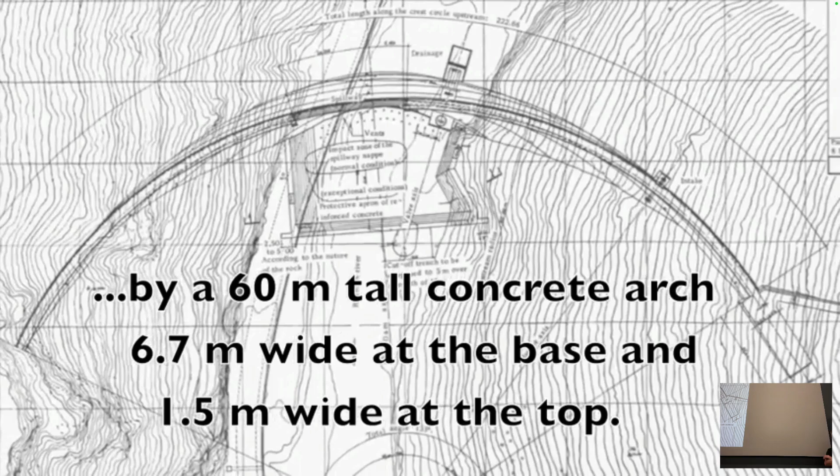And so we'll talk about that starting today. We know how to get a profile of pressures as they change with elevation, and so we need a formal way of being able to evaluate that, and some examples of problems that have developed with that.

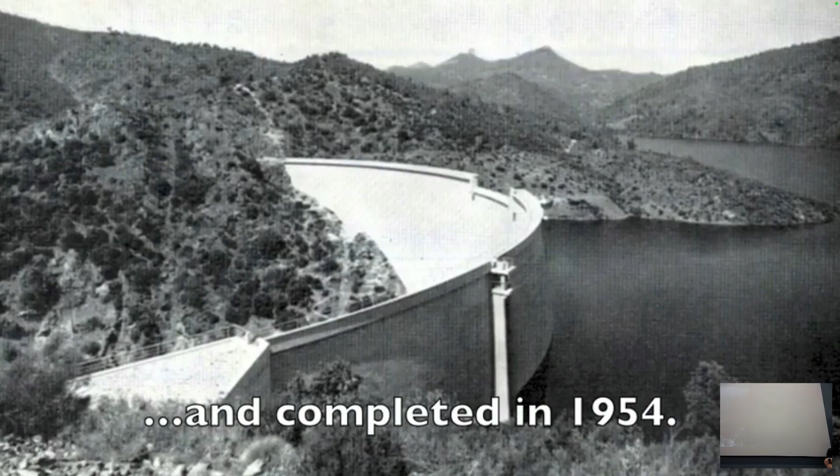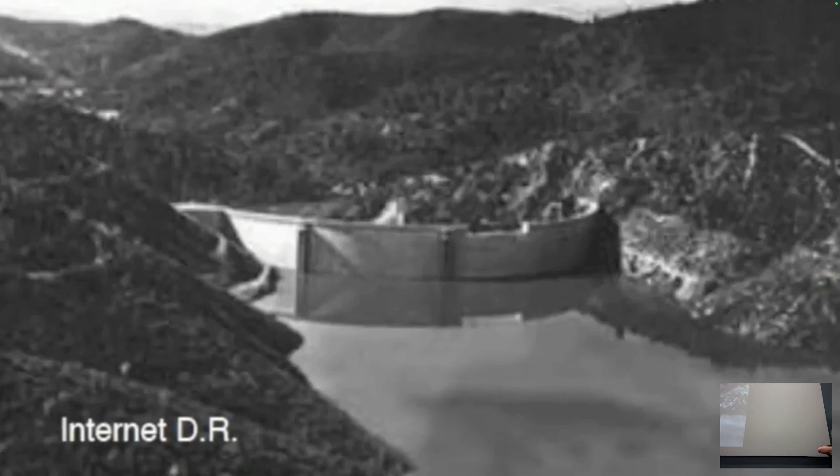One of these is the Malpasset Dam, which is south of France, in Provence, near Nice. It was built in the 1950s, a thin arch dam, so a very thin shell that goes across the valley and is anchored in the walls of a canyon. The water behind it pushes against the back of the dam, and the reaction is from the walls of the canyon.

And of course, in many of the things that you work on, environmental systems engineers, petroleum engineers, mining engineers, you work less with concrete and things that you fabricate, and more with the geological subsurface, things that you don't fabricate but have to characterize and figure out whether they're strong or not.

And so this dam, in heavy rainfall—perhaps it's already broken by the time I've been sitting here chatting—in a heavy rainfall, got loaded up. This would be a spillway, an emergency spillway over the top, so it can discharge when it gets to the height of the dam, because the dam is designed for a certain pressure.

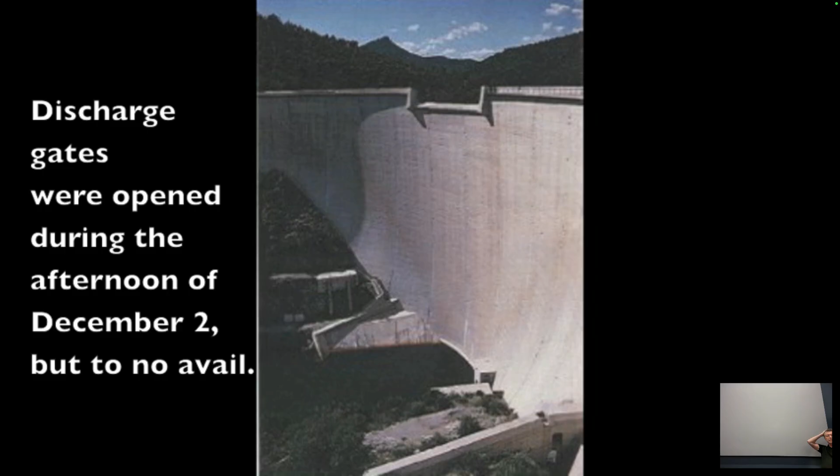And as a result of that, it discharged all the water. Well, I guess it didn't survive, thinking of the Vajont Dam. And so it discharged all the water and it went down the relatively narrow canyon, because typically you build these dams in narrow canyons to reduce the span that you have to complete across the valley.

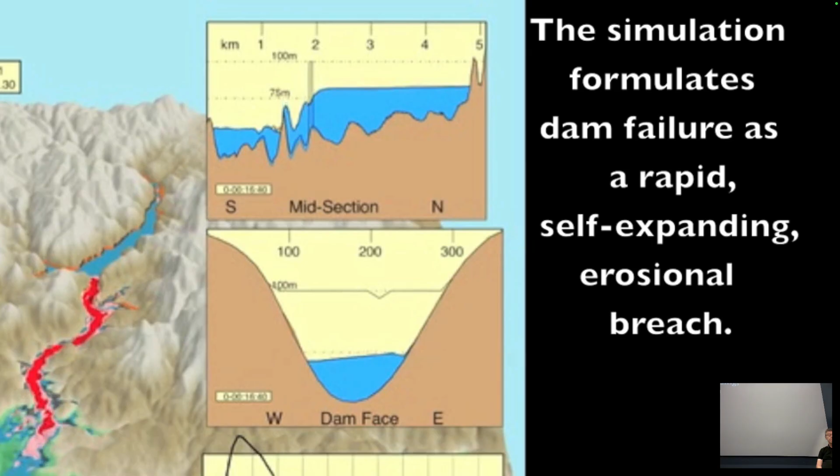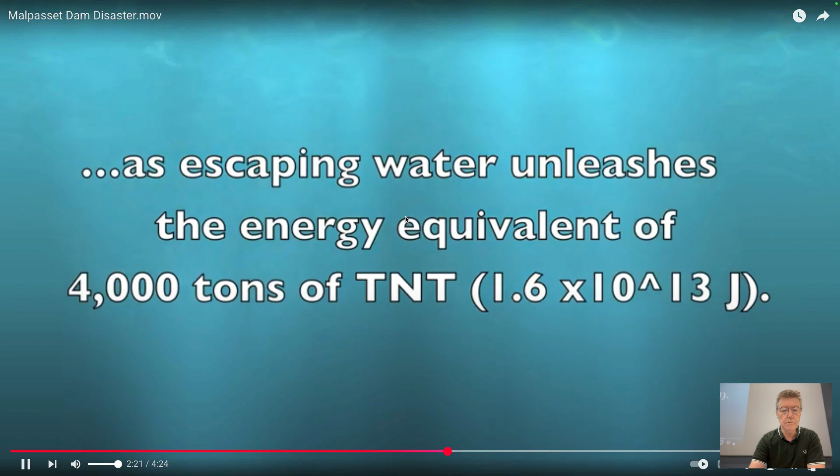And as a result, I think it killed 495 people. And so the question is, how do we calculate exactly the magnitudes of the forces that will be acting on the system to see whether there's enough resistance? Clearly there was enough resistance in the dam, but by the abutment shifting, it fractured, and you saw the resulting gap in it. So that's an interesting statics, fluid mechanics question we have for today.

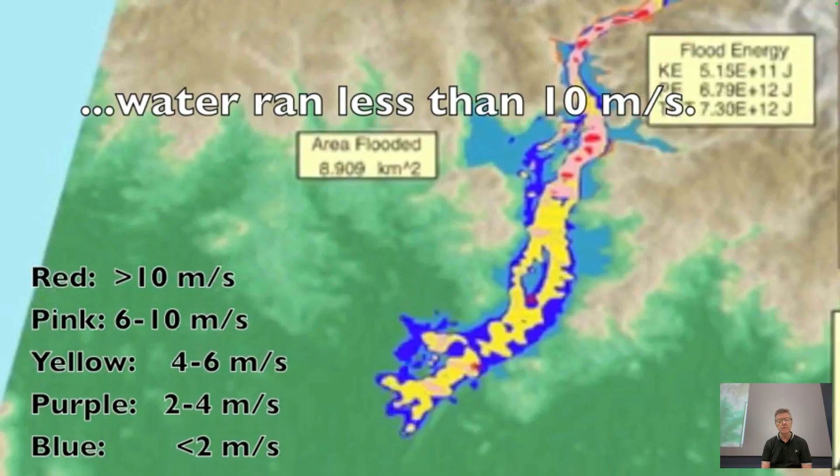The dynamics of it is what happens with the pulse of water that races down the valley that killed the 495 people. And so when we talk about Bernoulli, and we'll talk about conservation of momentum, those are the essence of the mathematics, the physics that goes into the models that allows you to do these calculations—a pretty elementary calculation in this case.

Topography, that you have fluid running across and being able to calculate exactly when it would arrive at some location.

And of course, the most recent example of that would be the Texas tragedy of the kids staying in their camps. Big rainfall—you can calculate exactly what a big rainfall does to the hydrology, surface water hydrology. You get a massive rain landing here, you know the topography, you can do exactly the same kind of calculation as was done for this, and that was done apparently, but apparently wasn't communicated in an appropriate way to them.

Vajont Dam is another dam, another interesting case—not a dam collapse, but a case where the whole side of a mountain above the reservoir dropped into the dam, dropped into the reservoir, and as a result evacuated all the water over the crest of the dam. The dam still stands today. It's got a lot of rock inside the reservoir that was there, but it also killed a couple of thousand people, I think, in the narrow confines.

So we're doing death and destruction, I guess, today.

And I'll go through this quickly as well.

So, yeah, perhaps you don't need this.

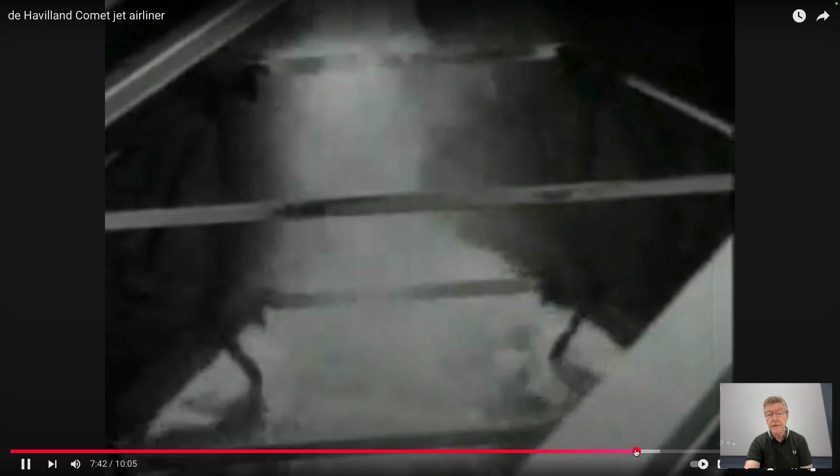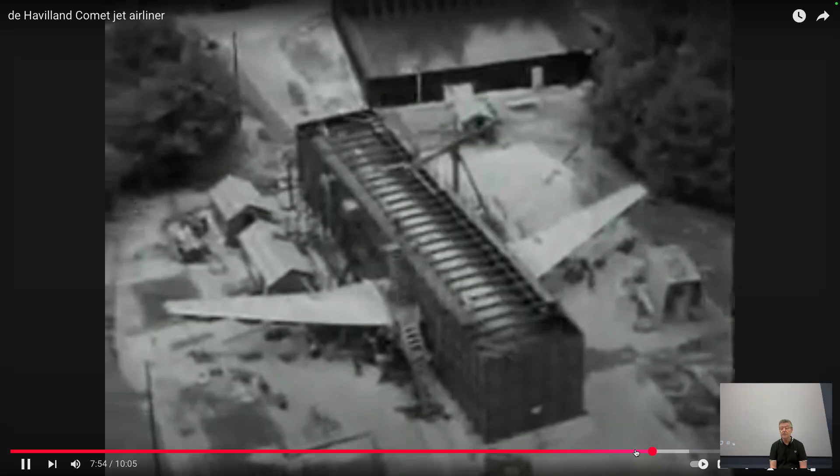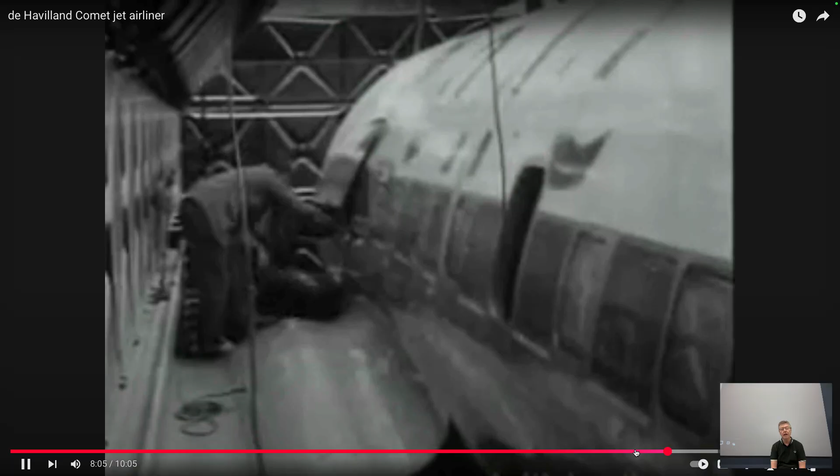But how can you test for that? Well, what you can do is take the plane, put buffers around it in a tank, put water in that tank, and pressurize the inside of the plane to look at the relative difference between the internal and outside pressure as perhaps a mechanism by which it's falling apart. Ultimately, you see again the square windows.

You take it through a bunch of cycles, so it takes off and lands, takes off and lands. If it goes up to 30,000 feet — we saw that at 30,000 feet, Everest, it was something like 20 kPa, surface elevation is 100 kPa — so it goes through that pressure cycle every time you take off and land. As a result, you get fatigue cracking from the number of cycles of pressurization. You could proof test that on an airfield and see when it finally ruptures the skin, applying pressure to the inside of the airplane skin to see exactly why it behaved in this mysterious way you didn't want.

What else have we got? Oh yeah, I think this is an animation as well. Perhaps not in your time — I can't see the. You guys are 20, so that's 2005, I think before your time.

This is Aloha Airlines flying between the Hawaiian Islands. Lots of takeoffs and landings because they have short transit times, so you can squeeze many into a day. Again the problem of fatiguing, and also added with perhaps a salty atmosphere. It ended well, I think, except for one flight attendant who could not be restrained by the people sitting in their seats. Probably not the way you want to travel, landing with such a beautiful view all around you. But it did make it down, and everyone survived.

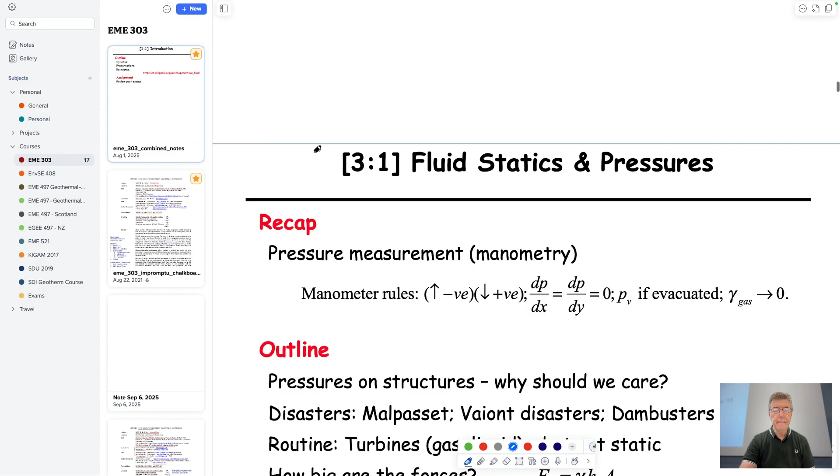So to try and bring the war effort to an end in Europe in 1943, I would imagine that's some of the motivation for the kinds of things we'll talk about today. We'd like to be able to not necessarily destroy things, but work for the public good. So what we'll do is talk about the issue of pressures on structures. We'll spend the next 3 sessions talking about that.

As is our plan, we'll do a very brief review of what's going on so far. We know from pressures at a point, we have a couple of equations of relevance. We know that everywhere, the change in pressure with elevation is equal to negative unit weight. The negative is because the positive values that we have are positive upwards. This is pressure, and this is negative Z, this is positive Z.

And so from this we know for an incompressible fluid, P1 equals P0 plus or minus gamma H. So this would be P0, this would be P1,

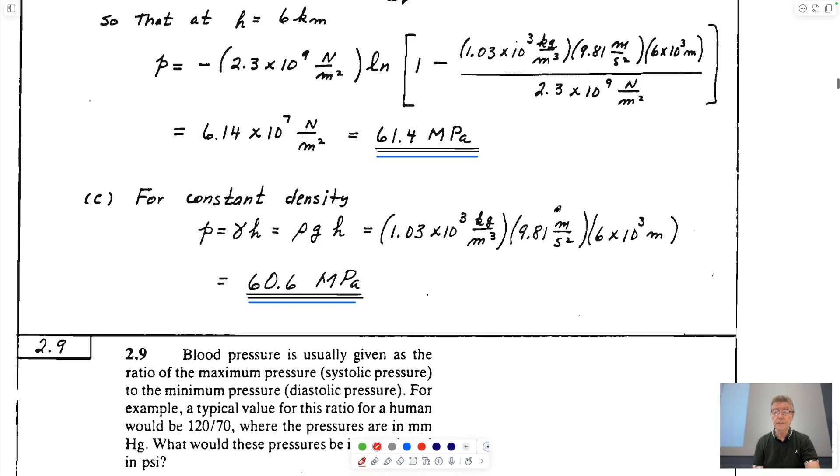And we did some examples with manometers, and we also did some examples talking about pressures on surfaces, if you remember. And if you remember, we talked about this concrete step. The other question we had this morning was about the other way we thought we could solve it, instead of just balancing weights of concrete and pressures acting on the base, we could just do a free body that included just the steps themselves, in which case the pressure acting on this upper step was given by its location relative to the top of the concrete.

This is the free surface of the concrete. The depth would be h down here multiplied by the unit weight of concrete. That pressure would act at a point. And I guess the other thing that we know is that pressures act the same in all directions. So Px equals Py equals Pz.

It was in that manometer equation. And so the maximum pressure acting on this step is going to be the vector which has the maximum component, which will be the one normal to it. So the pressure acting at this point will be in all directions, but we only care about the one which is normal to the surface, because that gives us the force that applies here.

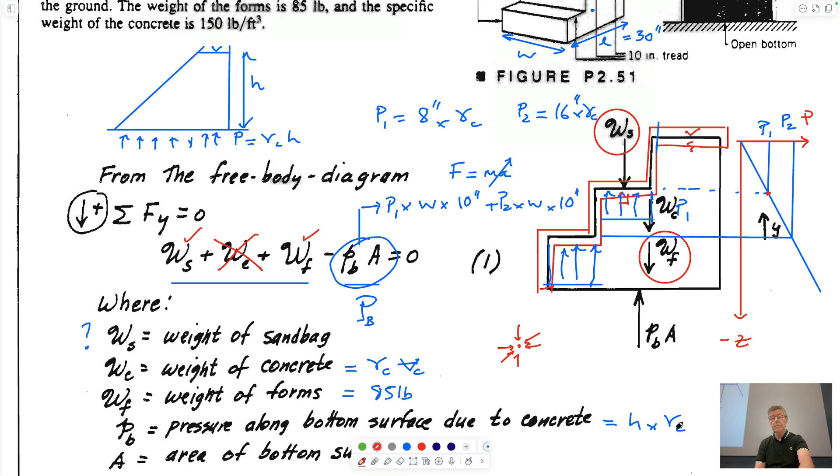You would calculate the forces acting up here inside the bubble, taking the pressure inside the bubble multiplied by an area. The force acting upwards would be equal to pressure times area, that's all we're doing here. This is the pressure acting at this point, which we know how to calculate from last week, but now we'd like to calculate the magnitude of the force that's acting.

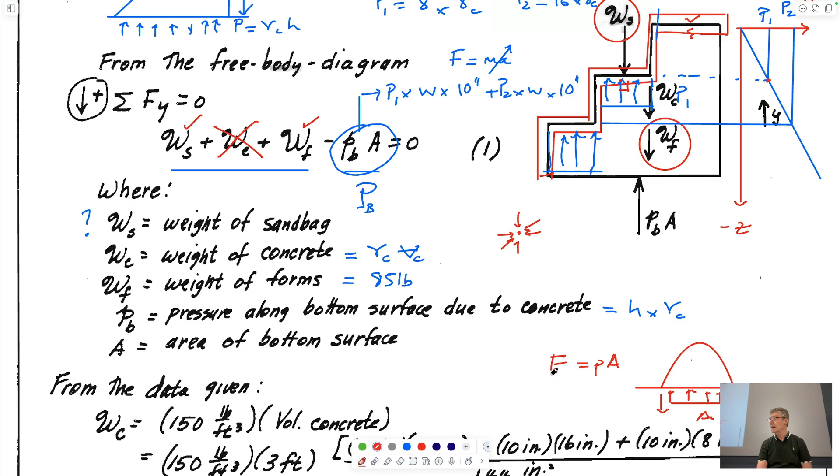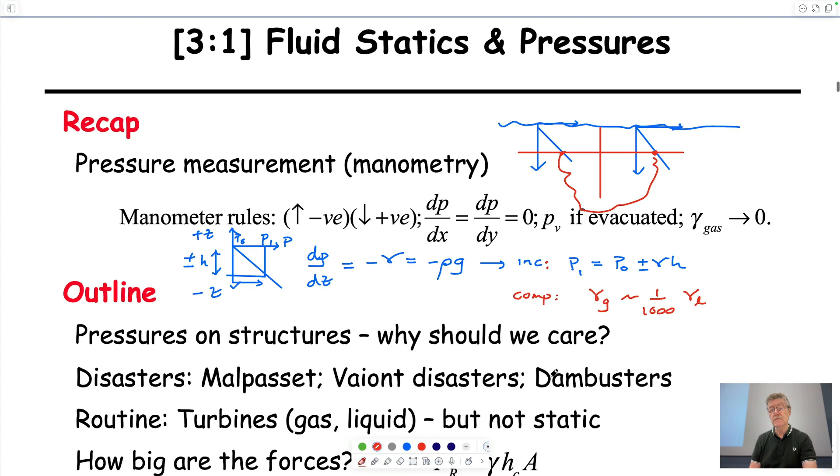So we can calculate the forces acting on the abutment of the Malpasset Dam, or acting on the skin of the Comet airliner, which would act against the tensile strength of the airliner. Or I guess we could also think about a balloon, we talked about balloons as well. That's a much better balloon.

And so we know that if we want a balloon to go up, we haven't done it yet, but we know that the density of fluid in the balloon relative to the density in the atmosphere has to be a certain way, right? It's because of forces inside it. We'll find that out in due course.

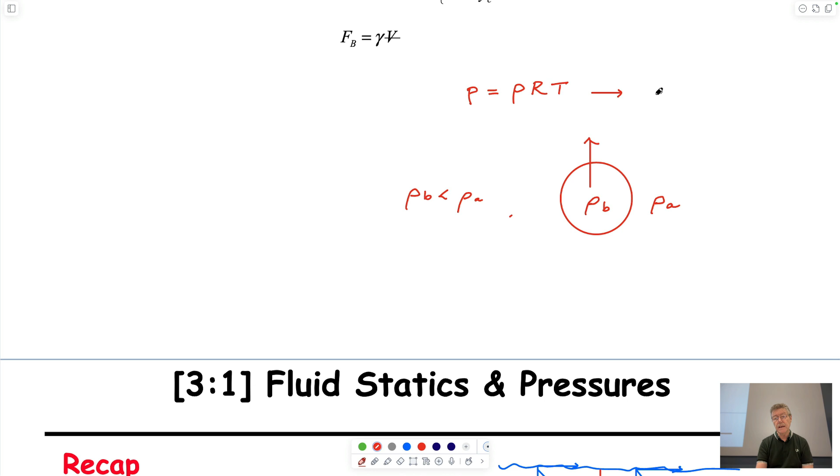And so if we want that to be the case, the conditions for a balloon to rise, you can calculate from the ideal gas law. Absolute pressure is equal to density, gas coefficient, times absolute temperature. If you rearrange that to get the density, you get it as a function of pressure over the ideal gas constant and temperature. So if you want to satisfy this relative to the atmosphere, you can reduce the pressure, increase the temperature, or increase the gas coefficient.

Two of those are tenable, right? Hot air balloon, you increase the temperature. What's the guy's name, Louis de something, the guy who first did it in Paris, in the time of King Louis the something. I guess there are lots of them, up to sixteen.

You can change the gas constant by substituting air for helium, as the Stanford kids did in our view of the Bay Area. P is much more difficult to do. You can't really reduce the pressure because in a collapsible balloon it'll just collapse. If you had a skin that was rigid and you could reduce the pressure, that would be viable, but the problem is a rigid skin is going to be heavy, contributing to the weight acting down in addition to just the gases.

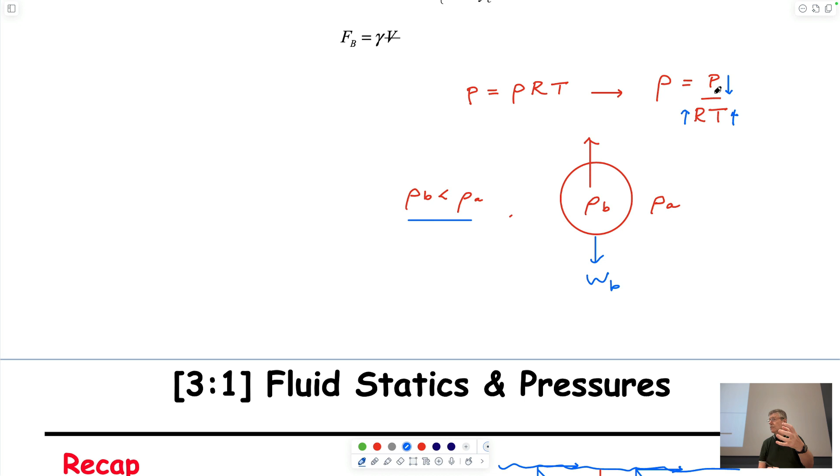So this is the weight of the balloon, if you like. And this isn't very easy to do because it will just fold on you. Things are much less sturdy in compression. If you take a Coke can, empty it, and put a bicycle pump on it to inflate it, you know you can ping it and it will carry pressure. But if you reverse the pump and suck air out of it, it will collapse, it will crimp, because it changes in a different mode. So, neither here nor there for this class, but anyway.

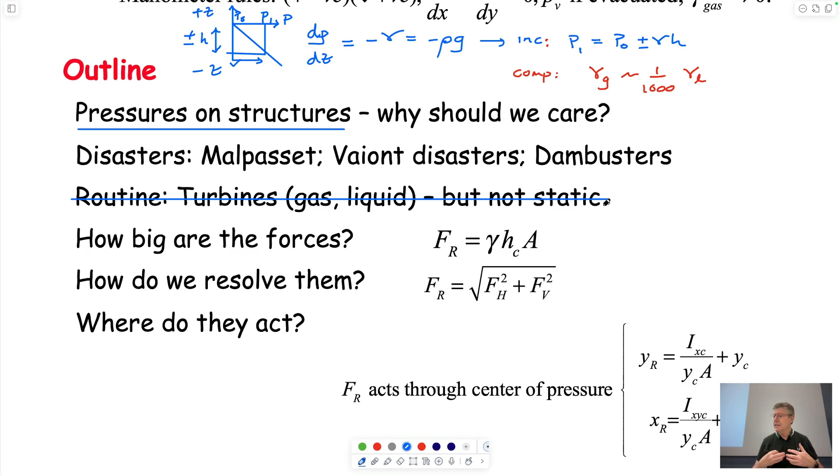So that's where we are with the stuff we've talked about so far. What we're going to do now is talk about pressures on structures. Why do we care? We know. I don't know what this is, so I won't even talk about that. Oh yeah, one of the things was a turbine generating energy from incoming waves, which we didn't go through.

And so there are a couple of things we want to be able to calculate, and we'll use some standard results. Today I want to develop these standard results, but we'll ultimately come back to defining and using them. So if you get bored with the derivations, take solace in the fact that you need the final results, not to be able to derive them, but it's useful to know where they come from. The resultant force acting on a system is equal to the unit weight times the depth of the centroid times A. We'll talk about how we get this.

The resultant we can get because if we were interested - perhaps I'll do them in order, this is an easy one to talk about. What happens if we have a force acting against the dam, which represents - don't do this red one - this represents the pressure that's acting here. Oh yeah, actually let's leave it there, acting here. In addition to the dam, we have...

the weight of the dam acting downwards. And if we know the weight of the dam and the force acting to the side, we should be able to do something to see where the resultant of these two forces lies relative to the toe. If we know where this water pressure acts as an average force, and where the weight of the dam acts as an average force - in other words, the resultant - then what we would find is that we could do something like this.

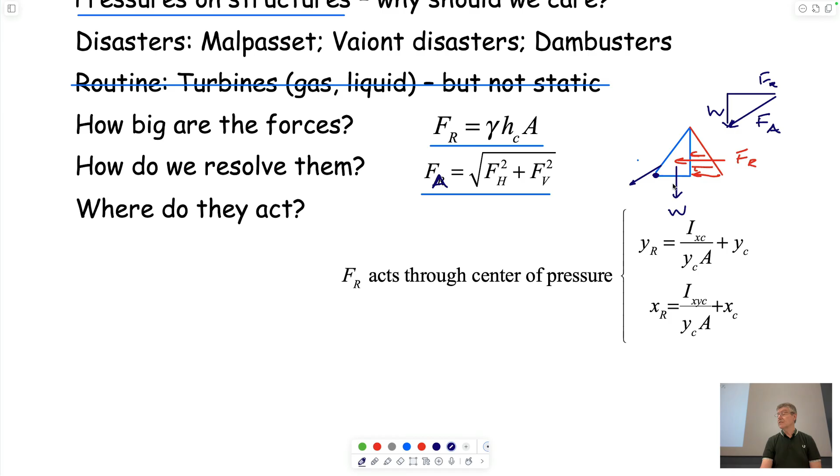The resultant that is acting as a result of these two, in this particular case, is FA. The utility of doing that is that FA, if we know where these act from, and if FA was outside the toe, then it would mean it would fall over like a domino. And we could calculate that. So that's one reason we're interested in that. Let's not worry about that now. We're interested to know what the resultant force is.

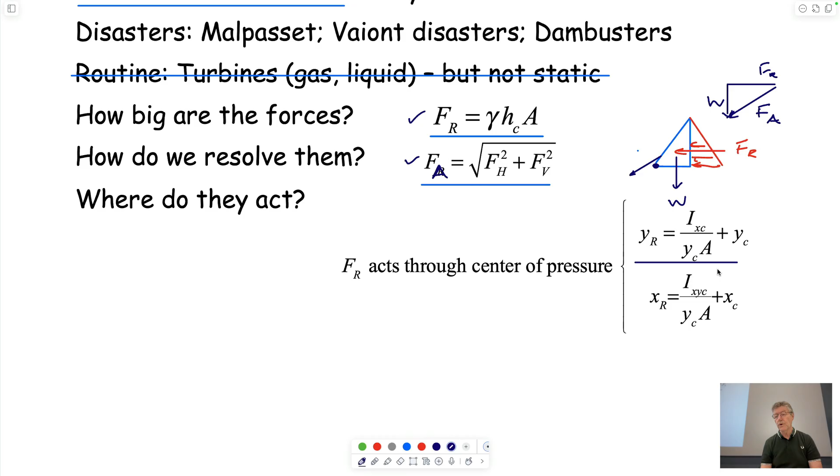We're interested in being able to resolve forces, and we also want to know where it acts. All right, let's do it a little bit differently than I usually do it.

Let's say we fill up a dam to this point here, so the forces are acting on this inclined surface, and we dry out the other side. What we could do is define a horizontal plate. This is the plate of the dam. This is the dam, the vertical dam side. This is the horizontal dam side. We're putting water here, and this plate is where the pressure is acting.

From what I've just said, it acts in all directions on that dam, but we're interested in the one vector that acts normal to it, because that'll give us the maximum force on here.

My attempt to do this is to take this coordinate system. This is going to be X, this is going to be Y. I'm going to draw some parallel lines, and I'm going to do this. Need a wider brush so I don't have to do it so many times. So this is our plate.

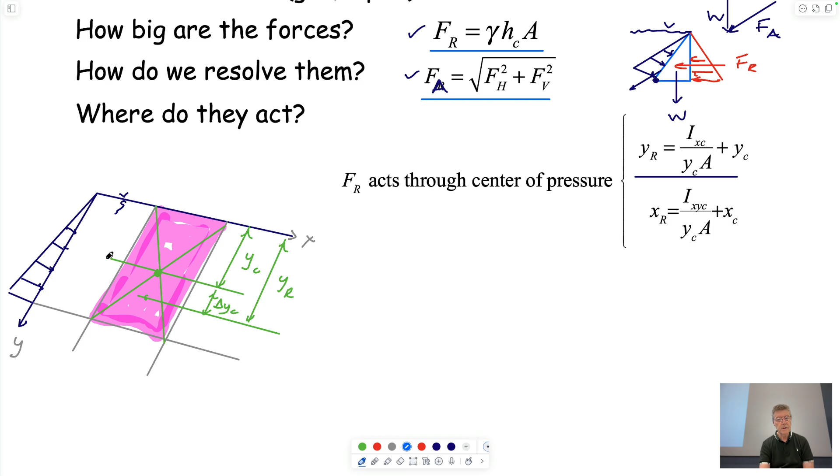In other words, in this geometry, I'm not sure how I can draw it. Perhaps I can draw it here, off to the side. This would be the pressure prism that is acting from the surface, so this is where it intersects the water. I guess the water, if I do it in blue, would be a horizontal line here. Purple is here, water surface is here, and this pressure prism - triangle, I guess, not prism - is coming out here and acting on it.

So there's a lever arm. I don't have a pen. I could write a little dx dy volume here with a lever arm from this point, and if you went all around this thing, they'd all balance at this point. If I had a knife edge for this and put it on that knife edge, it would balance here, it would balance here, and it would balance at every intermediate point that I put it through - the centroid. So you know the centroid from your math.

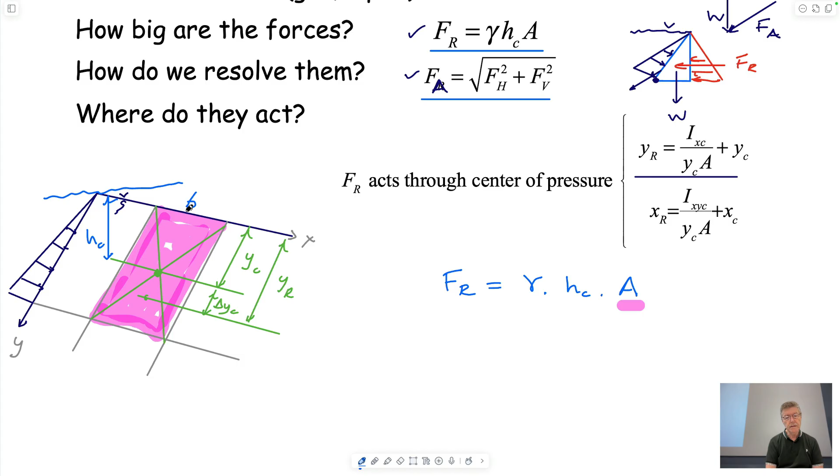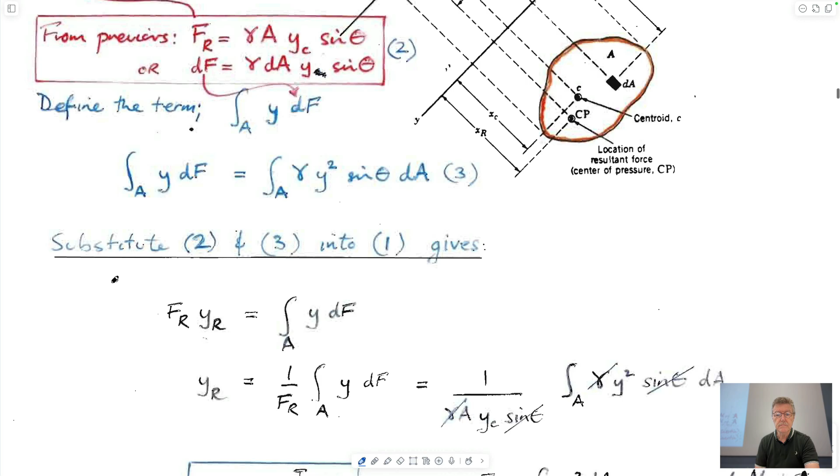Looking for standard results. Too far down. There. Yes.

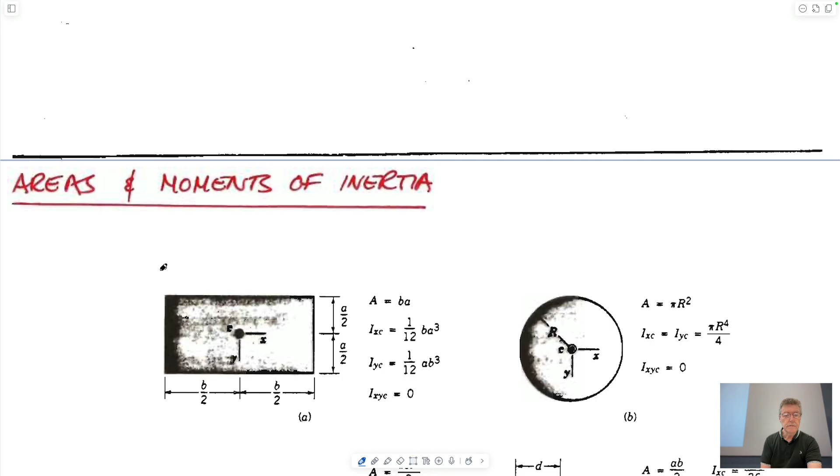B, A. We'll come back to this. I just want to use the same terminology, not technology. Okay?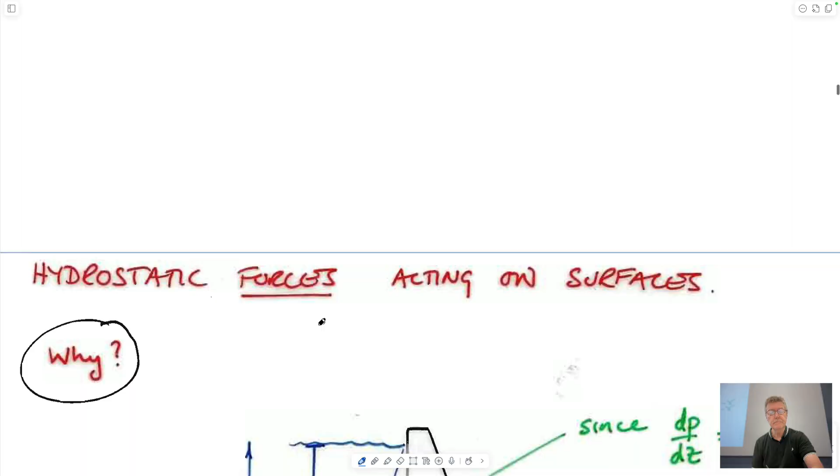So if you know what B and A are, BA, if you know what the depth of the centroid is below the surface, this vertical distance here, and if you know where the centroid is, of course it's the balance point, it's the center of gravity of this, right? This has gravitational attraction for all the weights of the pieces of paper. It could be a piece of plyboard or something, in which case the weight of the board would be more obvious. And it's just the balance point where all the lever arms multiplied by the small weights balance out across it. And you need the unit weight of the fluid.

The reason this works, if you wanted to do it, I don't know whether we want to do the derivations.

If you take a vertical plate and you look at this, so this is this. So this is X, this is Y. What would we do? You want calculus, right? You really want calculus. You're missing out. dy. This is B.

If I just draw what would happen to the pressure prism as you go down, it's like this, right, on the vertical plate. So this is what? P is equal to unit weight of the fluid times depth, y. I'm doing y positively downwards.

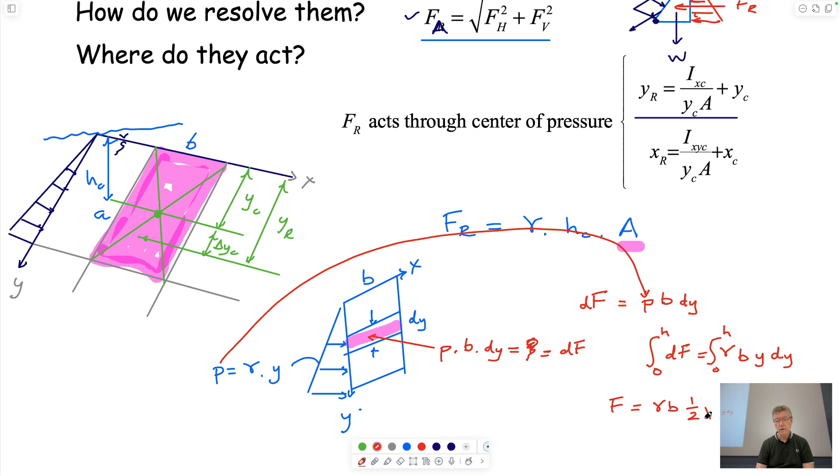And we'd get F is equal to unit weight times B, half y squared. And if we split that up, we'd end up with FR is equal to unit weight times a half. Okay, so I have to substitute limits for this, I guess I forgot.

0 and h. So this will become half y, h squared. So this will become... didn't do that, yeah, h. And get rid of this. So this is equal to unit weight h times b. I think it's right. My math is usually horrible, but I'm pretty sure that's right.

And I'm pretty sure that's right because it echoes exactly what we have here. We have a resultant force. It's equal to the unit weight. It's equal to the height of the centroid, vertical sheet, h, half h, which is this point here, and it's equal to A, which is the height times B. So this is it. So we could have done it by calculus, but this is a standard result.

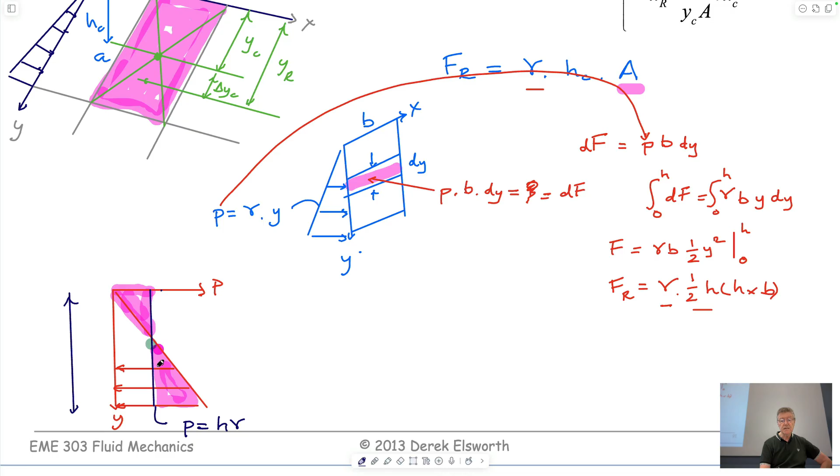Then what we could do is we can take this area here and move it to fill up this gap here. And so, by definition, the pressure that's acting is going to be equal to half the pressure, right? Because we're moving this triangle here to fix for this one. That means that this is just a prismatic distribution. This prismatic distribution is equal to the pressure at a half H, half height.

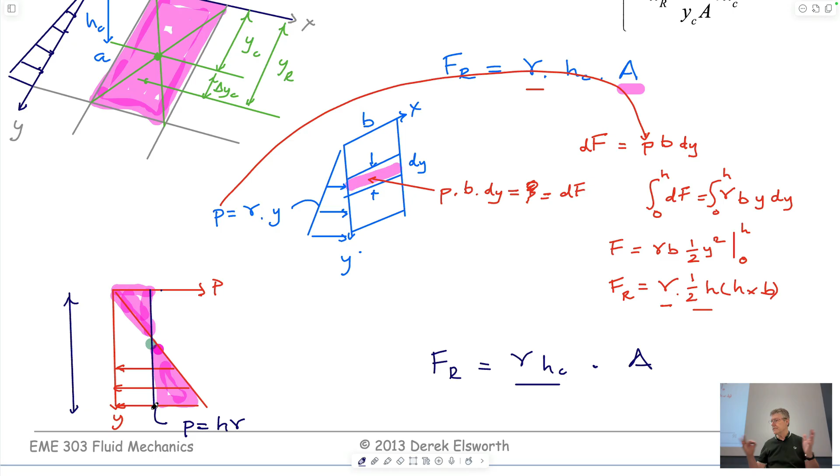So actually the other way to think about this is that if the resultant force is equal to the unit weight times hc times the area, then this is just the average pressure that's acting. The average pressure is acting at the centroid because we can take this little triangle and move it here, by definition, to make this a vertical line. So that's defining it at a whole bunch of different angles. But in the same way that we define that this is always true, absolutely - this is only true if it's an incompressible fluid, but this is always true.

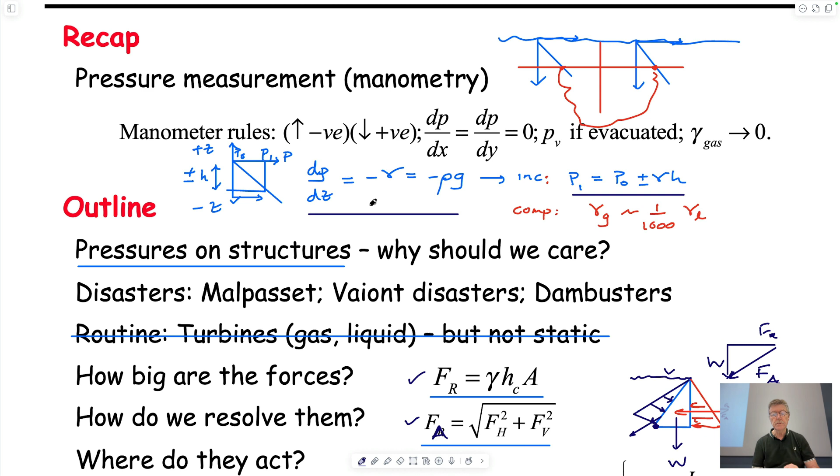This relationship we have, that the resultant force is equal to the unit weight times the depth of the centroid, which is the average pressure acting on the plate, multiplied by the area of the plate. The plate can be a rectangle, a triangle, or a circle. You just have the appropriate location of the centroid.

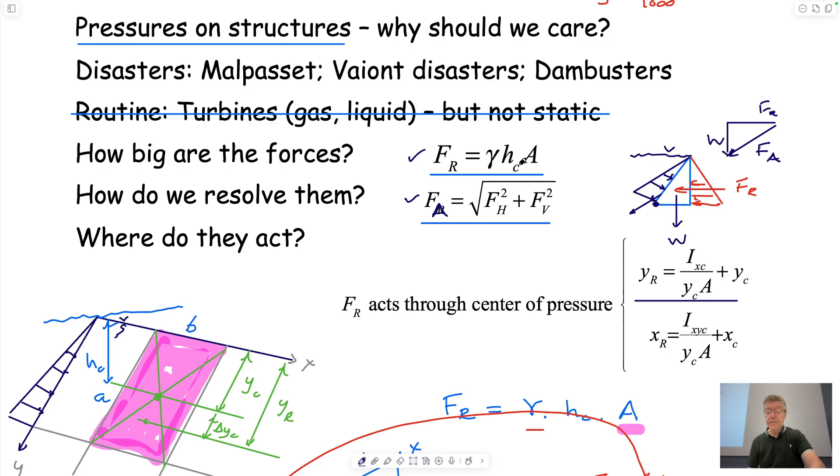The other thing that can happen is that the water level would be, say, this is the surface of the water, and maybe the plate is here, in which case the pressure acting on that plate would look something like this. Again, this is the pressure with depth. I don't know if I did it so it would work out.

I don't want to do that. Maybe imagine if this plate was continued all the way up to the surface. Did I do it right? I might have done it right, actually. It wasn't very cleverly drawn. This obviously has to go to 0 at the surface. It kind of does, but maybe I don't want to complicate it by doing that.

But now, this would be the depth of the centroid, vertical depth of the centroid, h sub c. This magnitude is the average pressure. So this is unit weight times h sub c.

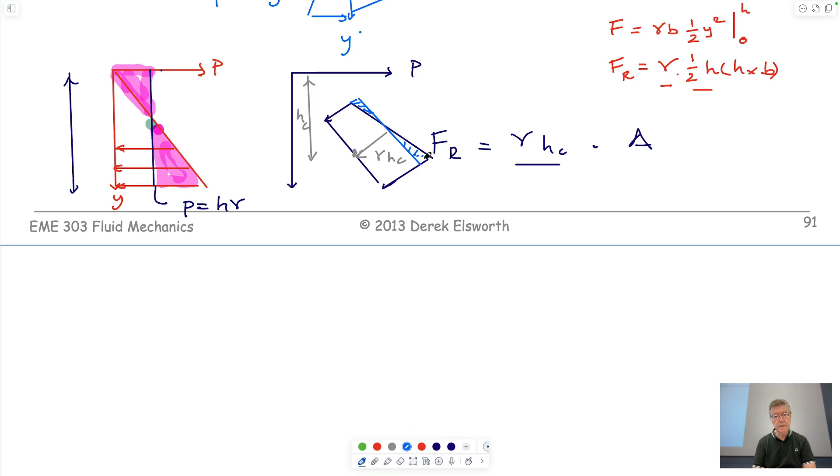And if you draw a line through that like this, then you have adding a bit here, subtracting a bit here, exactly the same as this. So, bottom line, always true. The resultant force that's acting normal to this is going to be Fr.

You'll notice that I didn't draw it through the centroid because it does not act through the centroid. Almost never does. Actually does if it's horizontal, for our stair step, but it will always be below the centroid. And likewise, in this case, FR would be here. Always acts perpendicular to the plate, right?

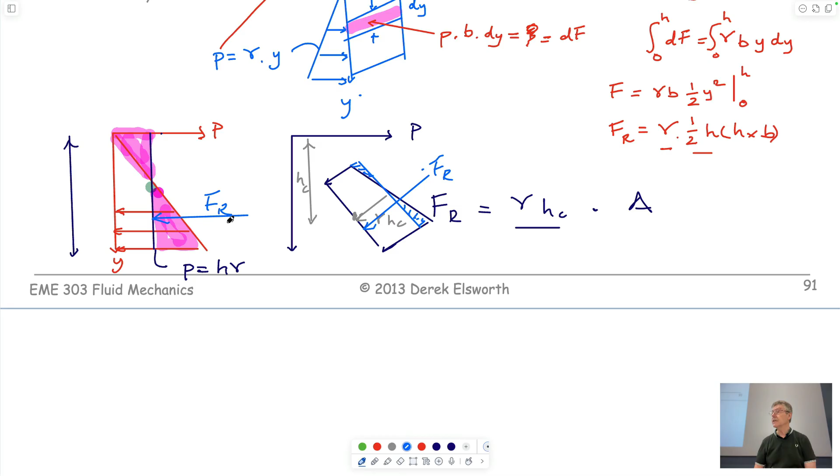So I'm trying to be as plain as I can. The more difficult one, I don't necessarily want to do the derivation. My reason for drawing this figure is that the resultant acts through the center of pressure.

And the center of pressure is given by YR. So when I drew this sloping figure, it doesn't have to intersect the water, but it did in the picture we drew. I specifically drew the depth to the centroid as h sub c, but I specifically drew the lengths in the plane of that flat plate, in the plane of the flat plate, as y sub c. And we call them different things - we call them h versus y. And so the slope distance to the centroid, this is the centroid of this plate, is this.

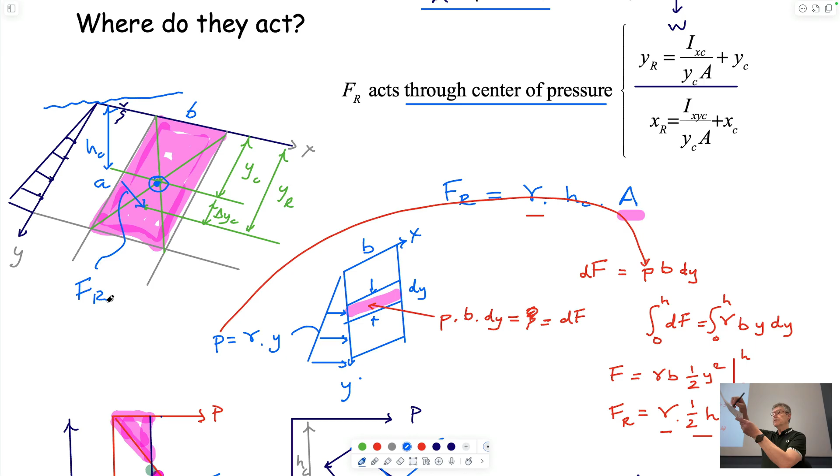But the location where the force would act - I'm not sure if I can do a very good perspective drawing - FR in this particular case would be acting normal to this plate. It would not be acting at the centroid, but would be acting somewhere below it, always below it. Can be equal to it if it's horizontal, otherwise would be below it.

We could derive it. I don't feel like deriving it today. You probably don't feel like a receptor for a derivation today. Do you feel like a derivation today? I'm a funny guy. Come on, cut me a break.

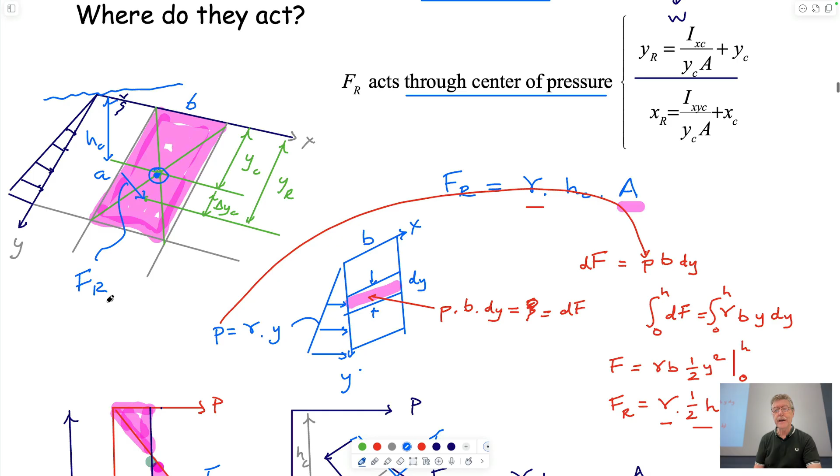Well, we won't do it then, but we will look at how this works. Okay, let's see if I can do that. Let's see how clever I can be. Oh, very clever. I feel clever today. Can I do this?

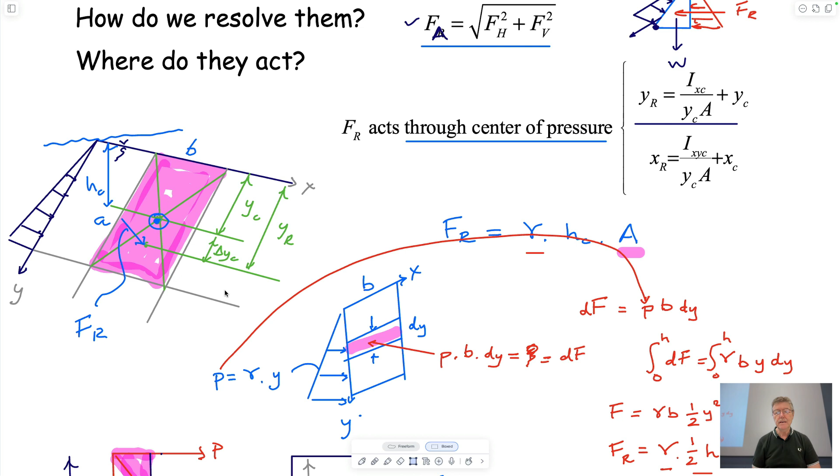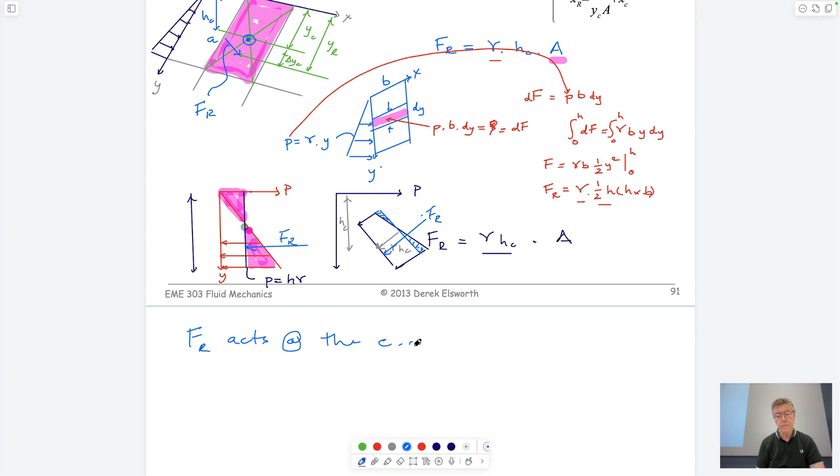FR acts at the center of pressure, the COP. And the location of the center of pressure, YR, is equal to the second moment of inertia about X, about XC - the second moment of inertia of the centroid about X - divided by the in-slope distance to the centroid multiplied by the area of the plate, added to YC. Okay, so these are all the dimensions.

YC is the distance from the surface. Actually, in this case, it's to the plate. But if the top of the plate didn't intersect the surface, it would be the distance to the surface. We'll deal with that in a moment.

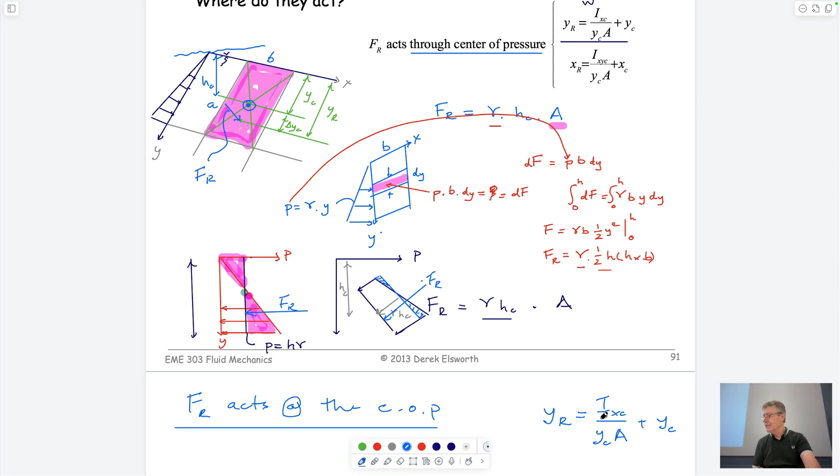And this is the so-called second moment of inertia about the x-axis for the centroid. Sounds complicated, but you've seen it if you've seen structures and beams in statics. It's a standard result for a plate that looks like this.

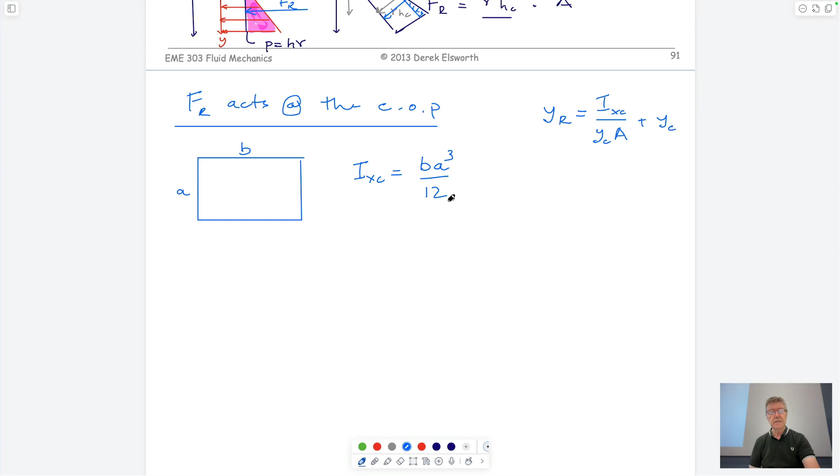That we've dealt with. This along the top is B, this is A. IXC is equal to B times A cubed over 12. I think - I'm going to check in a second, just to make sure. It's the stuff we looked at before. This is all in Munson, if you have Munson.

This is B A cubed over 12. This is the centroid of the plate. So this would be YC, essentially. And this would be width B, depth - which could be vertical depth or it could be angled depth - A, side of the plate.

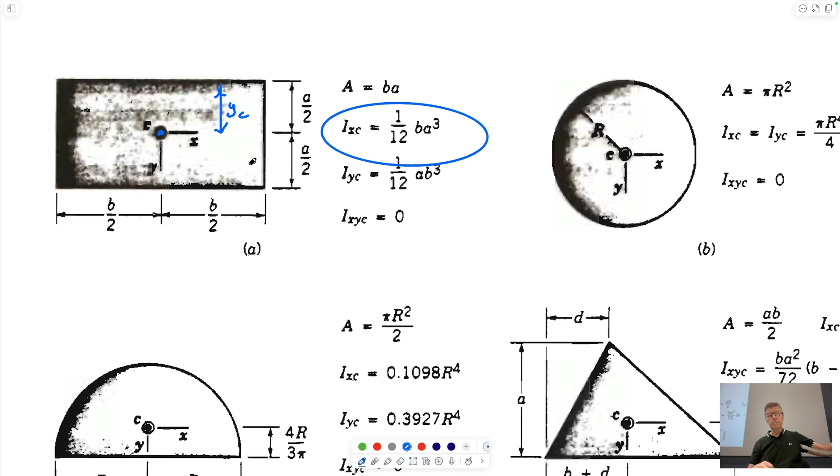So on our plate that we use, this would be B, and this would be - well, we unfortunately called it H, right, because we're looking at a vertical plate, but that's kind of ambiguous. So if we do that, I didn't mean to do that.

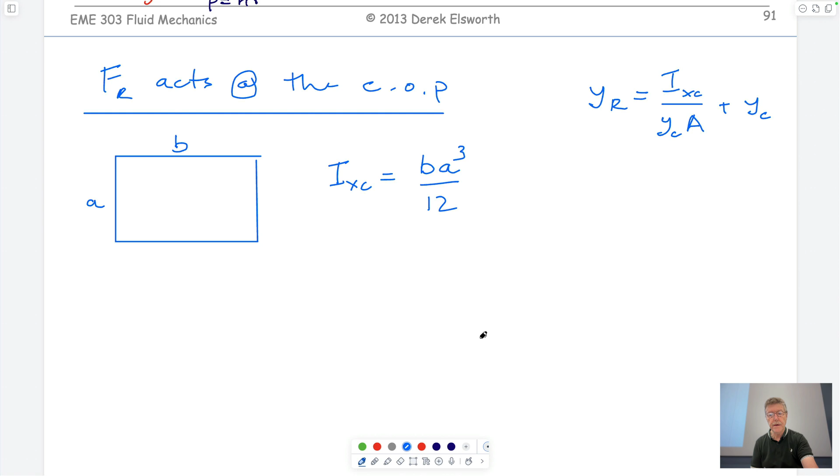Sorry about all the scrolling. So if we wanted to calculate the depth at which it works, we could do this.

YR equals IXC. So it's going to be BA cubed over 12. It's going to be YC, which in our particular case was equal to...

It's okay, so I'm going to do it for the case that we've already looked at. So this is the top of the water level here. This is what we've also called H. So this would be HC. This would also be equal to YC.

So this is a vertical plate. And YC would be equal to A over 2. Okay, so write it as A over 2 here. Area would be equal to A times B. And this would be equal to A over 2.

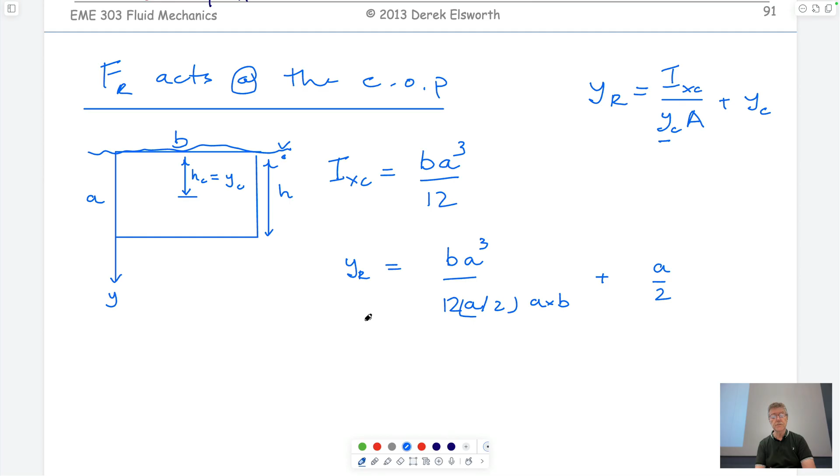All I'm doing is writing this out in the terms that we have for this. So YR would be equal to, if I cancel these out, lose this. We would end up with 2 over 12. We would lose this, and this would be 2. And this would be 1. So I guess I can get rid of that too, hopefully.

And then this would be plus A over 2. If we rearrange that, that would be 1 over 6 plus 3 over 6 equals 4 over 6 equals, I've lost the A, which is 2 over 3. This needs an A attached to it, this needs an A attached to it, this needs an A attached to it. Bottom line is that YR is equal to 2A over 3, which equals 2 over 3H. Standard result for this case.

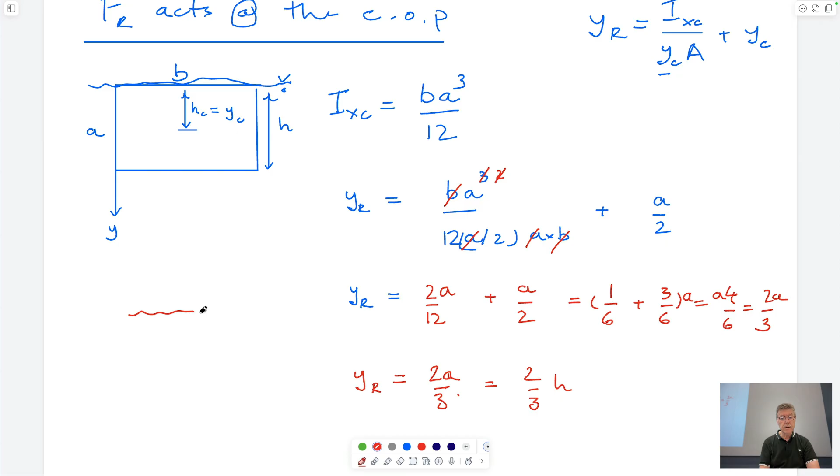So you have water going through a plate. How are we doing for time? Got 5 minutes. You have the pressure acting down as it intersects the surface.

People zipping up bags, ready to bolt for freedom.

And so what we find for this is that if we look at the things that we've talked about, FR, the resultant force, acts at, we've called this H before, so let's still call it, it acts at a depth of 2 over 3h.

And its magnitude is equal to the unit weight of water, the depth of the centroid, and the area. And the centroid is at a depth of h over 2.

So that's it. So now you know how to calculate the magnitude of the resultant acting at any position, and you now know how to calculate the location where it acts. It is always given by this expression.

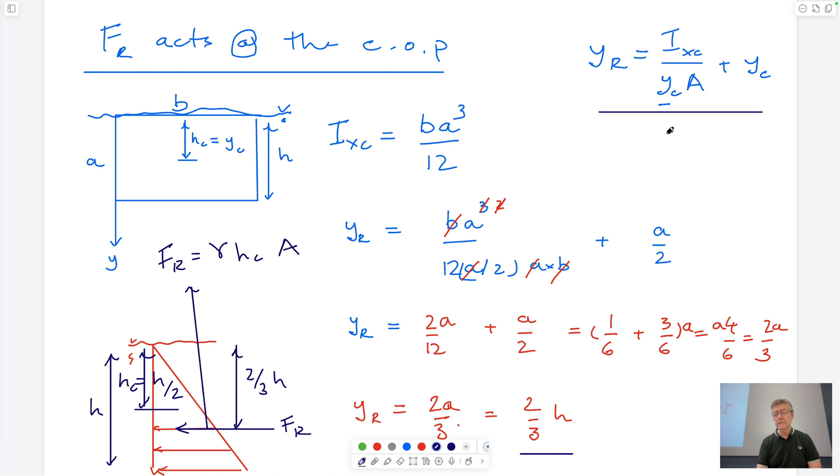And you'll note that the way it's divided up is it acts at the location of the centroid plus a small amount delta y. This is delta yc. And if you go back to our figure that we talked about, that's exactly what I have here. So you just need to orient everything. This is the key figure. We didn't do as many derivations as I usually torture people with, but you've got the result.

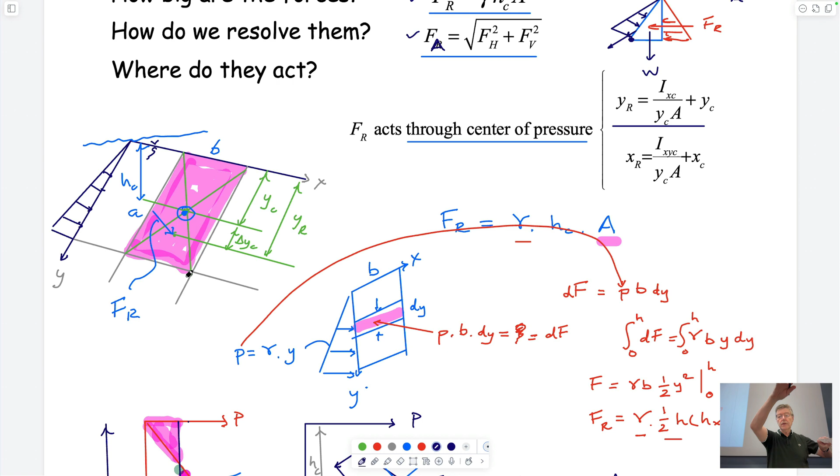So you have a width, you have a length of the piece of paper. It can be in contact with the surface or it can be way below it. It doesn't matter. You have to remember that if you want to calculate the magnitude of the force that's acting, you're using the depth of the centroid, which means the depth from the free surface of the fluid vertically to this point here, whatever that is.

And if you want to calculate the location by which that acts, y sub r, then you need to look at everything in the plane of this inclined figure. Up to the surface, the origin is where the x-axis crosses the top of the water. The y-axis comes down along the side of this. So the depth in plane to the centroid is the depth from the x-axis to this point here. And then delta yc is a small amount below it, and that's physically where that acts.

So now we know magnitude and point of action. And so we've done two of the things that we want to calculate. How big the forces are, and where do they act, we now know.

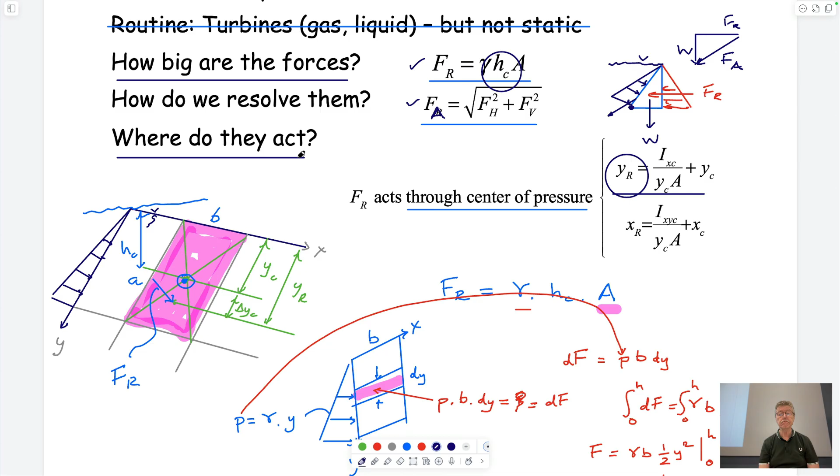And so now the other thing that will turn up in lots of the questions you do is kind of a failure mode. How do you look at how the dam rolls over to be able to resolve whether this force that's acting is a problem or not in your ability to design things? So that's where we're going. That's it, I think. Questions?